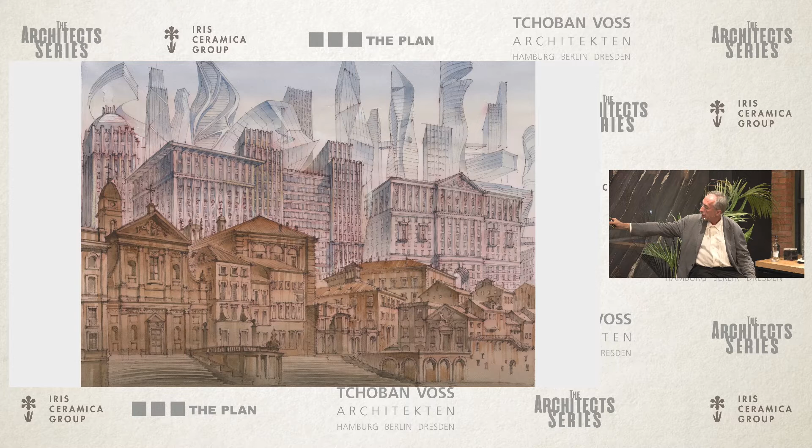Like 18th century work by Piranesi, 20th century the same blocks, but similar, not the same - another scale, another quality of details, another quality of town, much more density, much more huge - and then very free work of the town, very free body of the town of the 21st century.

Of course, we don't speak today about harmony as at the time of Piranesi, but also in the time of Piranesi we had a lot of controversies in the town. Remember the old temple with the Baroque church built just inside of it. So architecture was every time full of controversies.

And these controversies you see also in the town of Berlin. You see how deep the very controversial dialogue is between the buildings of, for example, the same time beginning of the 20th century or end of the 19th century, and the time of the mid 20th century after the war.

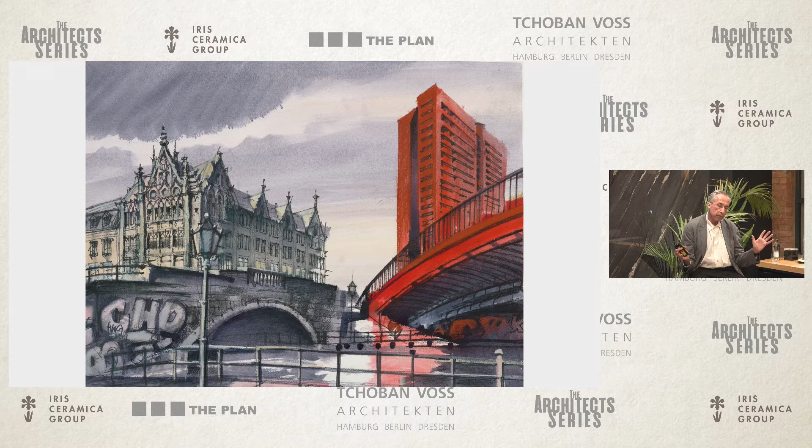So it is a deep contrast, a very hard contrast. And I think that is a hard contrast we have to preserve, because that is part of our history, and that is part of our memory, and that is a part of our town we have seen, we like to see, maybe we hate to see sometimes, but that is a part of our nature, of our cities where we grown up.

That's why I was just wondering about this house, and I wanted to preserve them against the client, because the client wanted maybe to demolish it, to make new facade. I explained it in the film, but in fact we found very poor substance and very bad substance.

But still, I understood that is a very, very important part of memories. That's why we got a budget. The budget was very modest, but we got a budget to rebuild this building, to renovate this building, not rebuild, but renovate, to save all that could be saved.

And in this case, we renovated the face of this very important after-war part of Berlin. I think it is very important work, and that is not important work only about physical sustainability, not demolished because you push out too much CO2, but not demolished because we don't like to push out our memory about the towns where we grown up, and we like to save, we like to keep this memory in our heads.

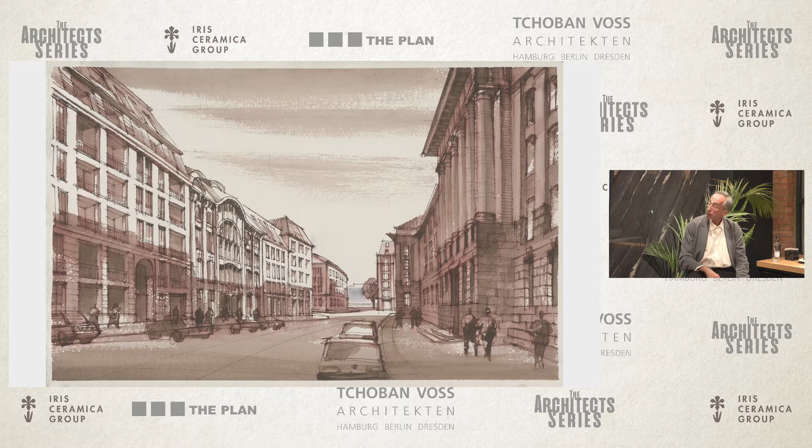In the middle, it was also made in the Jugendstil time, but already 100 years after, we have no possibilities from handcraft to make something else. So we made it more simple, like the house on the left, which was realized like the old.

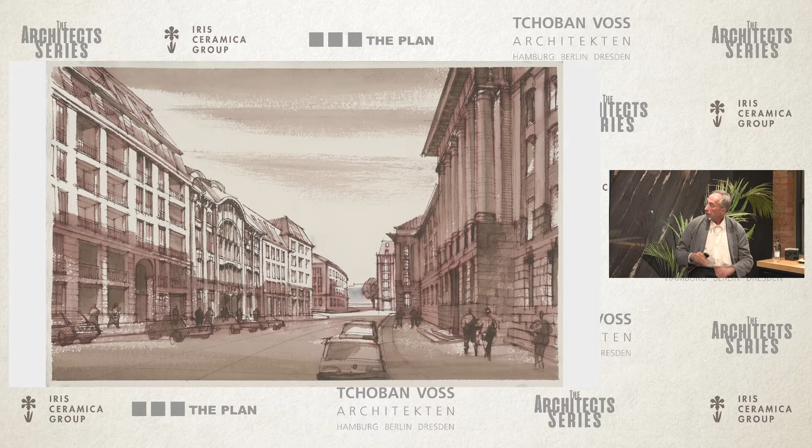But of course, that is in fact a very silly position, because the house on the right has in itself enormous power. To save it is to save a part of the history, because it was also a telephone station where the number one or number two from the DDR government connected with other governments of socialist countries.

So it is not only a building about 60s building style, but it is a building about the history of that time, the history of the DDR, and this DDR you cannot avoid. It is there, and it's very much in the body of Berlin.

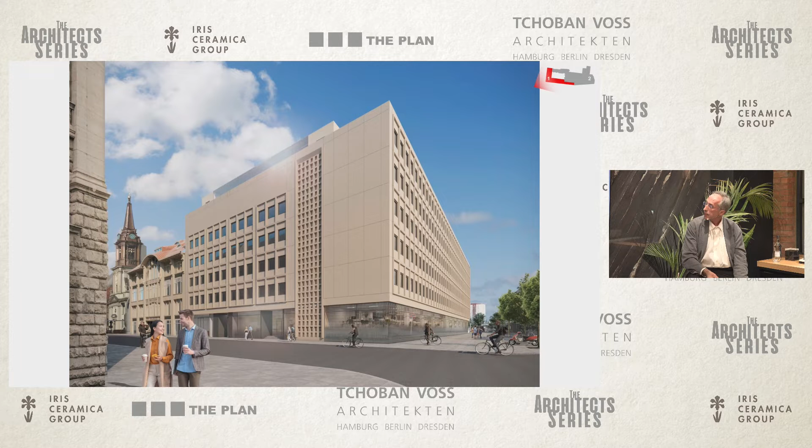Opposite them is one of the oldest buildings, the older city hall by Ludwig Hoffmann, an amazing building in Neo-Renaissance style. But in this contrast, I think we have a big sense.

And after that, to bring the new composition, of course we kept the line of the street and added some buildings to them, but did so by saving important parts of the existing building. Like this courtyard was before, this is now, so you recognize the existing one, you recognize the new apartment and office structures.

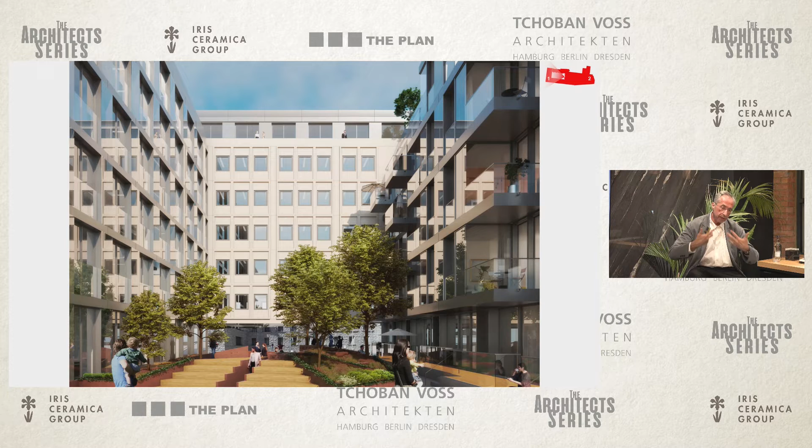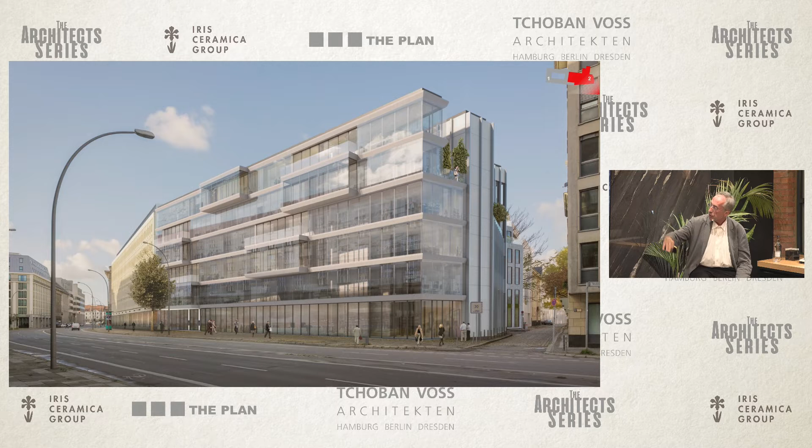And you still have this new contrast with the already contrastful building of the 60s. And we continued the line, making the new development along the street, quite contrastful to the left side, but also quite contrastful to another Ludwig Hoffmann building opposite.

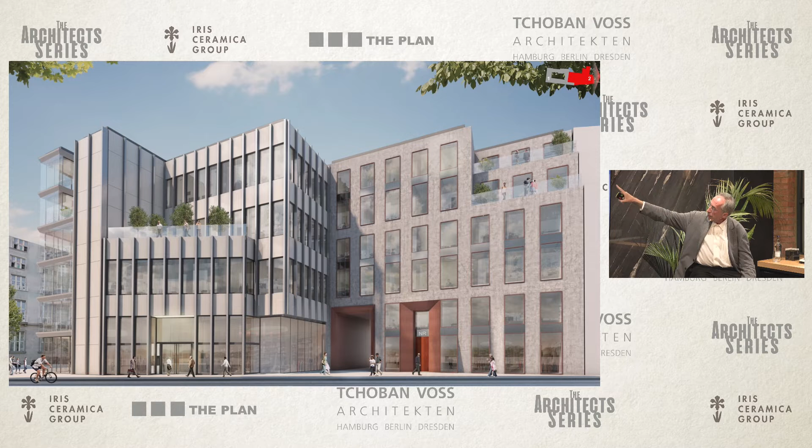But if you go around and see this small square, we added the square with some buildings, but you see very clearly the old one, this old telecommunication building, how it was, and you can recognize very clearly how the town planning of the DDR was.

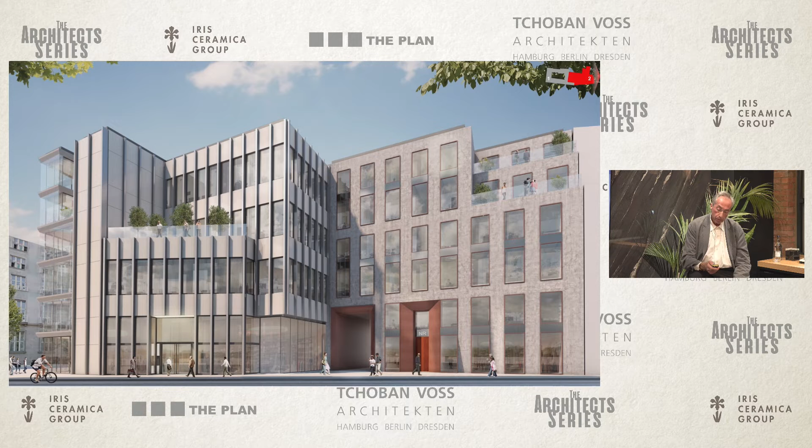And I think it is, once more, not about CO2 pushing out, it is also very much about saving the quality of ideas made in the time before us, and I would wish that my own ideas wouldn't go so radical as we sometimes do it, but to save them and to go with the next layer on top of it.

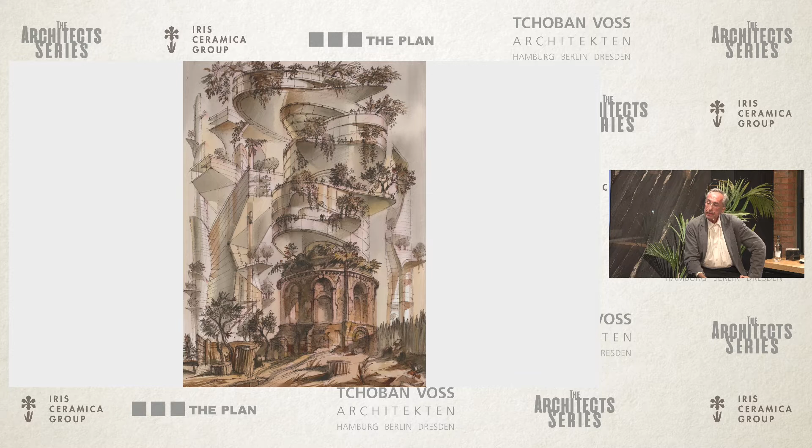Of course, the point of ecological thinking is everywhere around us, and as you see by the film, there are very, very many ideas of what is ecological in this complex.

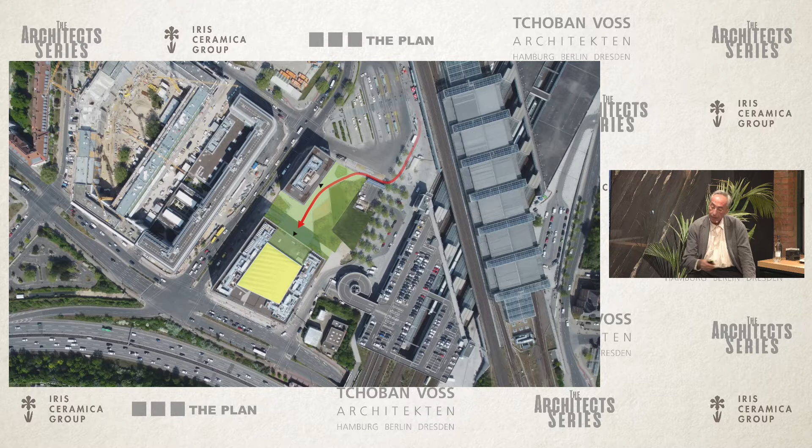We have a big green area, a huge terminal, which makes it possible to go nearly without parking places because all the people are coming by public transport. The whole building was made like a Lego work with a timber hybrid construction, which made it very, very fast in construction time.

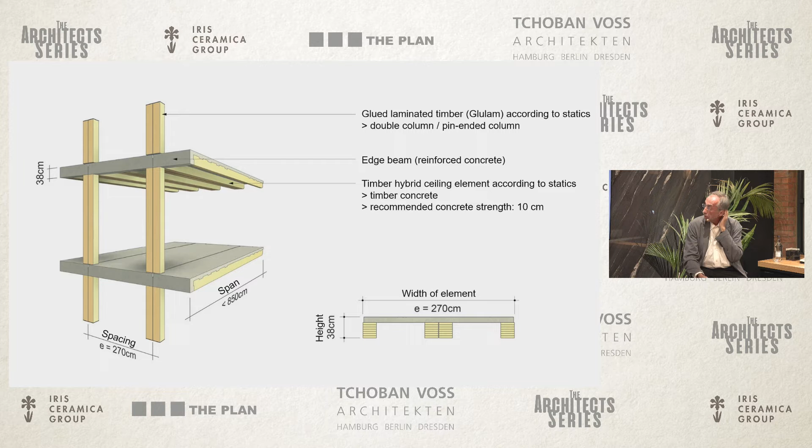In less than one year, around 30,000 square meters were built. It is of course sustainable from the position not to build long. It is a very light building, maybe 50%, maximum 60% of the weight of a normal concrete building. So you build lighter, you use less CO2, and you construct it really like Lego work.

Of course, I cannot imagine this building in downtown London or downtown Berlin, because this building is much less sustainable as a body for existing and enriching a downtown. But it is clearly a very good perspective for some office areas. They are growing and growing back.

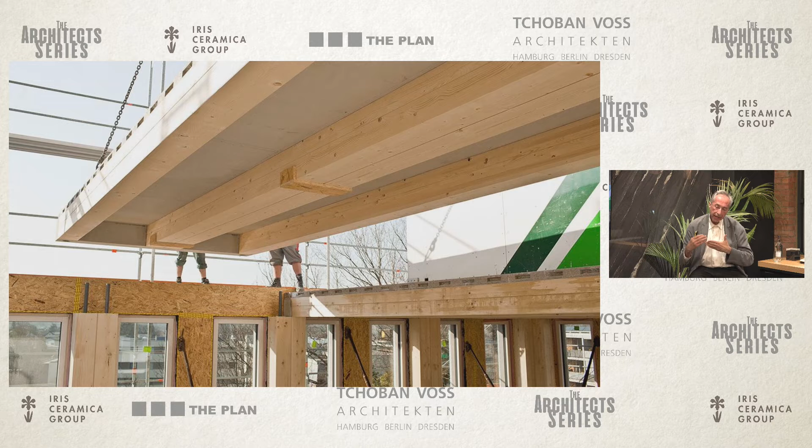Because in our office world, after COVID, we know we have 40% less the amount of office space needed for the same firms. This going forward and back is quite a nice idea from my point of view, because you don't set up something like a court that stays for 200 years and that's all, but you set up a model that could be developed, reused, recycled, partly changed.

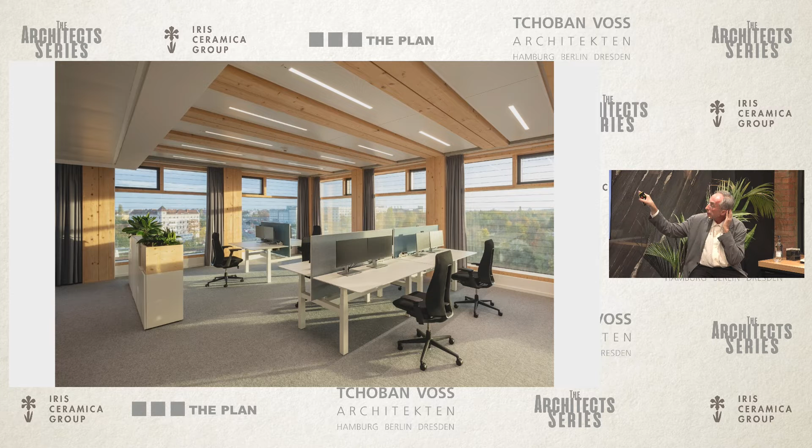For this filling of office space, I think this timber construction with prefabricated elements, prefabricated facade parts, timber columns, timber beams, with all the MEP elements involved between the timbers, is very clear, also very simple and pragmatic as a body, with some accents about wood, a big entrance, and of course much more extensive, expressive area inside.

Because if you like to build something really sustainable for warming protection, you have to be quite modest outside, because every meter of cantilever is some facade you have to protect against cold or warm weather. But if you are inside and already protected, you can be much more extensive.

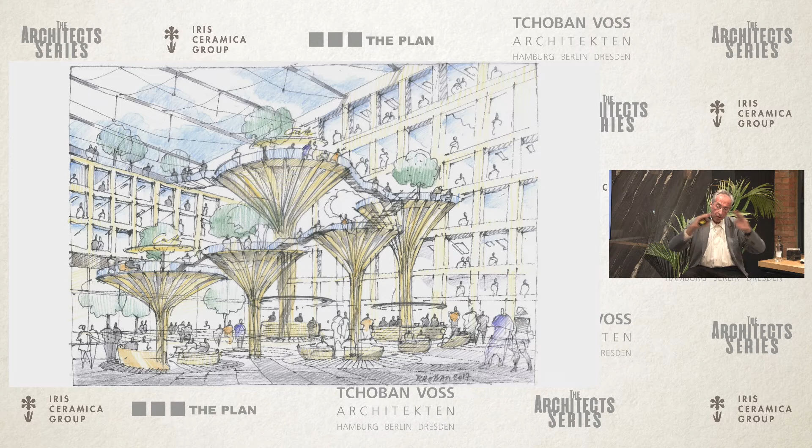So we have created here quite an interesting world, a part of the office world where you come from one level to another and go from one position to the other, can connect with each other, can discuss, have conference areas and so on. And then, step by step, you go till the roof, and the roof is also quite interesting.

It's a very light roof, only 45 kilos per square meter, and even against wind you have to protect it. That's why we combined timber and steel construction, which is very light—the timber elements are only 45 centimeters high, which makes them very light, with a lot of daylight coming through.

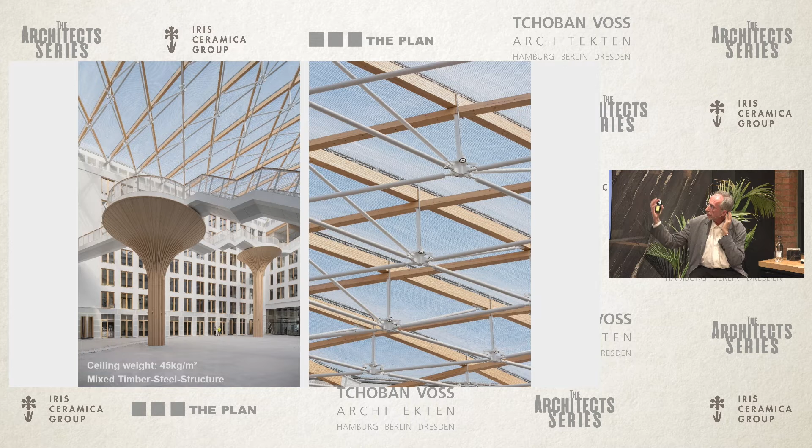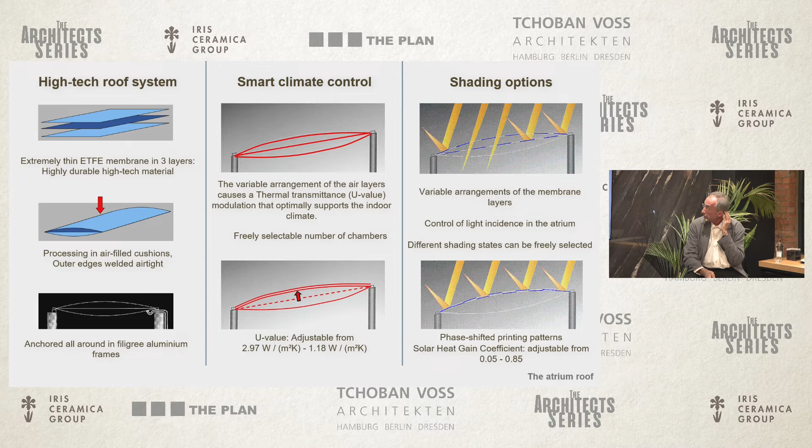It is not glass, it's a foil-tech roof, which is very good for acoustics. It's very good for cleaning, because the tension is much less, and it is very variable for sun protection. So you can react with this living roof to different conditions for sun protection, day or night time.

For cleaning, as I told already, the tension is much less than glass, so you can clean it very seldom, because all dirtiness goes with the water by itself, and doesn't stay there like a film as on the very high-tensioned glass construction. Here it cleans itself.

And with this all the way, you go upstairs, you go till the loggia, and they have a very nice space inside as outside. You are looking over the town. It's like a feeling of, let's say, light timber smells.

I've been there for 2 days with some people. There are a lot of people there. They like to see it, and sometimes I make excursions, and the feeling was very good.

The people were sitting on these islands, on the trees, they were discussing, they were coming over and down over the staircases. The light was everywhere, still on, because the people were working there, and you've seen these Venetian ceilings with beams.

Nice feeling. But as I told, it is a sample to make like a Lego work for some office island, made as a big office island, but not in the direction of deep and dense downtown.

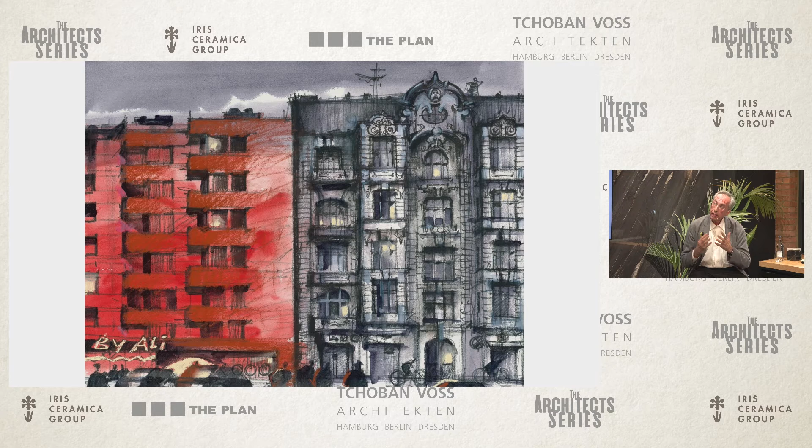We don't find today the people making such details by plaster or by stone outside. It is a completely different understanding of handcraft, of handwork in the world. So we have to create comparable quality to what was made for 100 years, but with completely different elements. Also, our facade structure became completely different.

It was massive for 100 years, so if the plaster was going away, you would see the brickwork. If now this very thin element goes away, you see something stupid, maybe some rats or I don't know who is living there, nobody expected it, but they are there. And it's a completely different feeling of material.

Steel we have to work with, and we have to create after this. Behind this facade is also insulation, and behind this facade is also insulation. But the surface should express something that can be compared with a historical structure, not in the way that we put gips plaster on top and create from very poor materials something that looks like neoclassical, but with other materials.

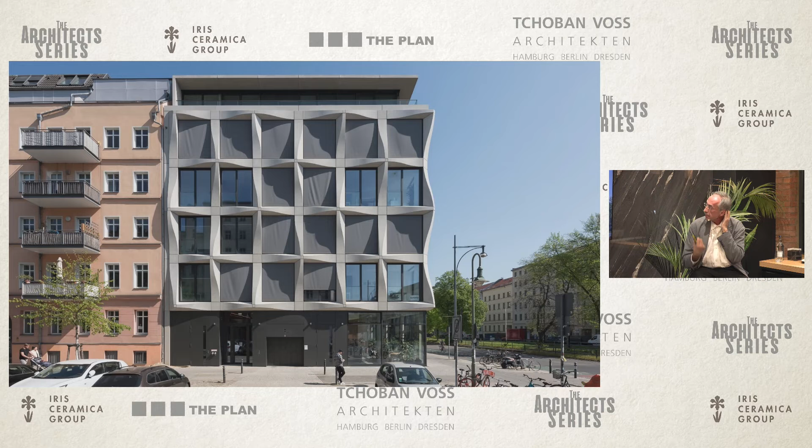Another feeling for surfaces without the details of the past, but hopefully with the same depth of the past, making the houses in another way, but with a quality of monolithic surfaces comparable with the quality of monolithic surfaces of the past. That's my idea: to create with contemporary materials, with contemporary structures, something that could be, I hope in the better samples, comparable with what a very normal plaster house left could make with very simple handcraft at that time.

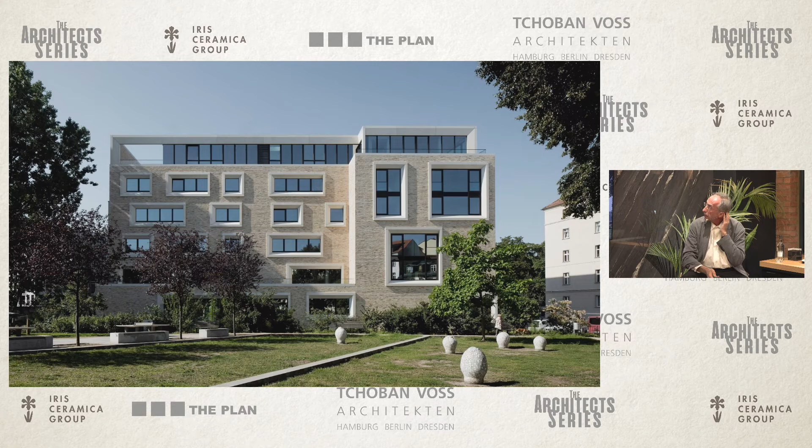So we have interesting brickwork. We go with this brickwork against concrete frames and create something that, from the sustainability of materials, from the soil sustainability, these materials could stay long, could age long, could age well, and create surfaces that are interesting to touch, interesting to come closer to and feel as touchable and serious surfaces.

Another point we have to speak about is, of course, the scale of the town—the scale of what my colleague Frank Focke explained with these three gable houses. At one time I thought, okay, we had this modern building from the 60s, we demolished it and made three gables back, but with much less detail than before.

So it is also some controversy in this position. But one thing is clear: we have small sections of parcels, small sections of addresses of houses. And that is, of course, what we have to keep in the old town, because otherwise we will create huge buildings with huge scale, incomparable and uncomfortable to see next to the historical small parcels left and right.

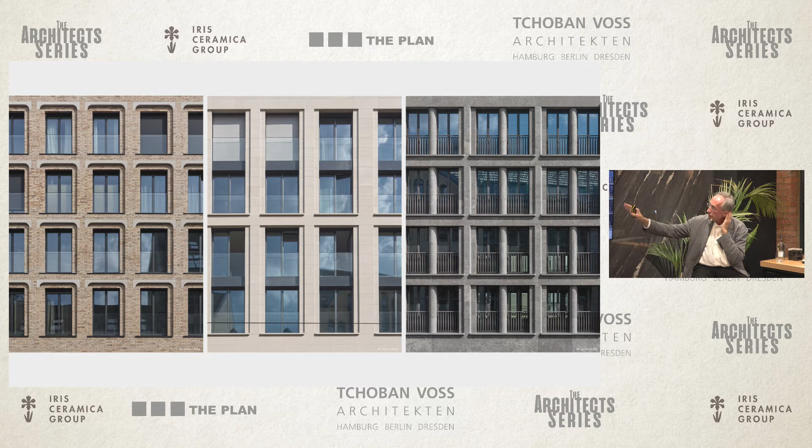As I had to build something, unfortunately demolishing before a very huge and scaleless building on this side, I decided to make really three addresses with three, I think, serious surfaces, serious elements and reliefs. They are of course not with the same details as it was for 100 years before, but hopefully with very small curved elements of railing, small curved elements of concrete, fine brickwork, fine elements of natural stone window framing.

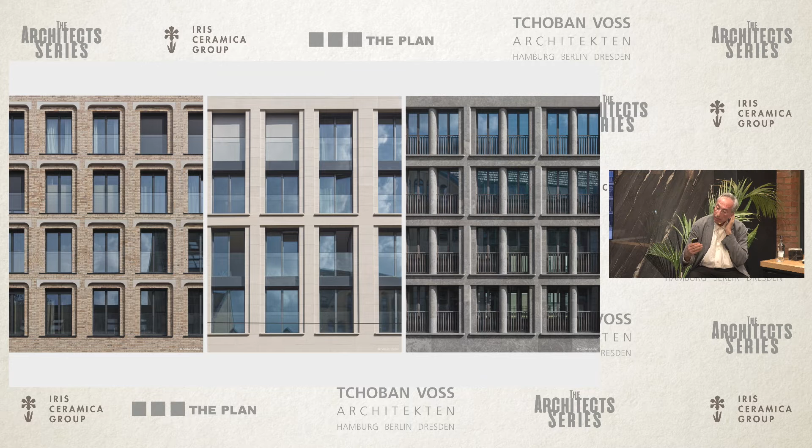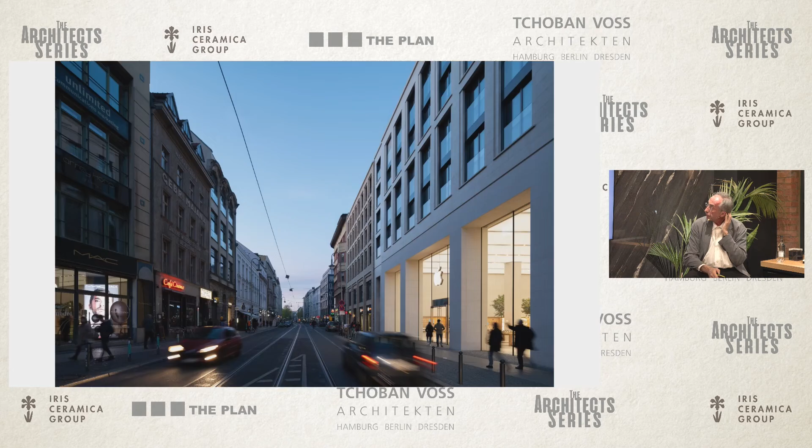I hope to get somehow closer to the feeling of surfaces I am amazed by in the old buildings. Of course, also the generosity of entrances, generosity of ground floor openings, or as in this case with a void till the first floor for New Apple in Berlin. This makes them somehow a destination, and hopefully gives them a chance to stay in concurrence with very interesting old samples and elements of this very typical street of Berlin.

I made this one. Of course somebody can say it's completely ugly, but I think it's not ugly—I think it's nice, because you have the volume, the reliefs of this corten steel, old steel elements. They come in relief, but also in the quality of patina of these elements. Near each other, you get the same effect of a big street and neighborhood with similar details.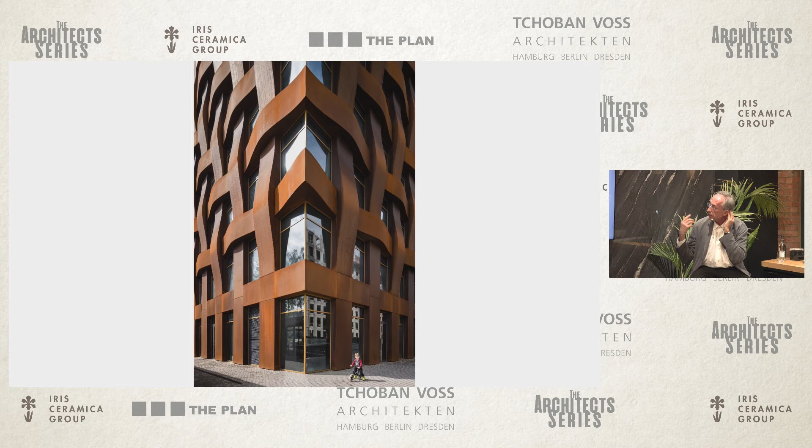Still you get a similar effect with the relief of the pilasters, but not by reconstructing the columns—rather by creating another relief in, from my point of view, a quite contemporary way, but also in a way that allows a good possibility to create a patina, to age this work of facade, this Fachwerk of facade, and bring them a feeling of materiality, not a feeling of paper as a material of facade, but a feeling of materiality.

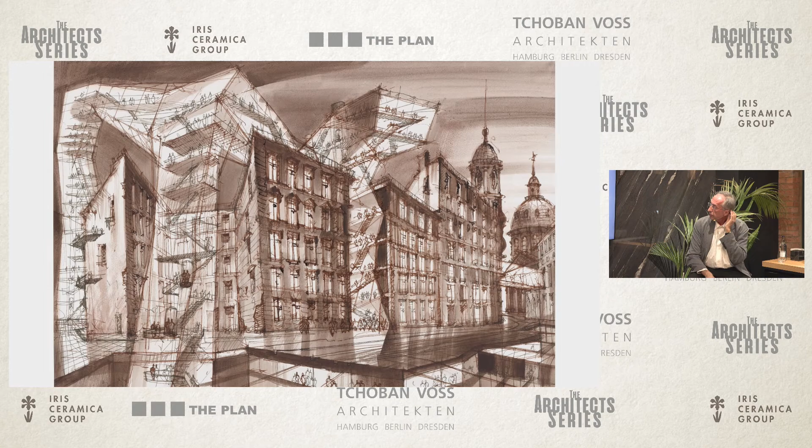And of course, another point is the form. Earlier, the form being very significant was not really a point—maybe the form was significant for some cathedrals and gate towers, but for normal buildings it was not a point. Nowadays, of course, we have a lot of buildings with extremely important form, and this form gives the accent for big parts of the ensemble.

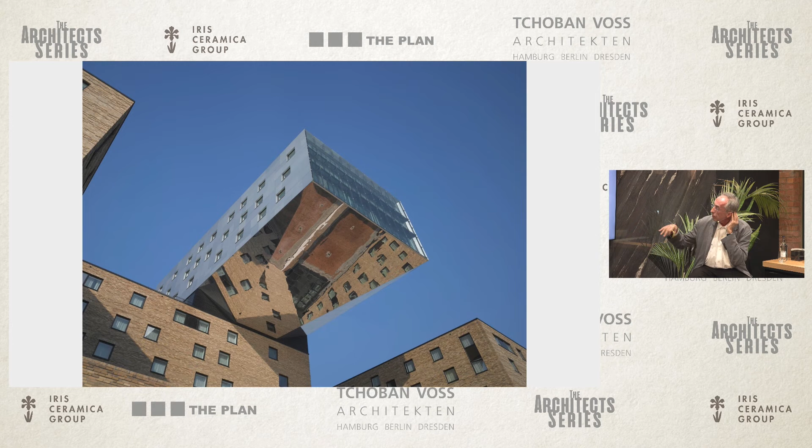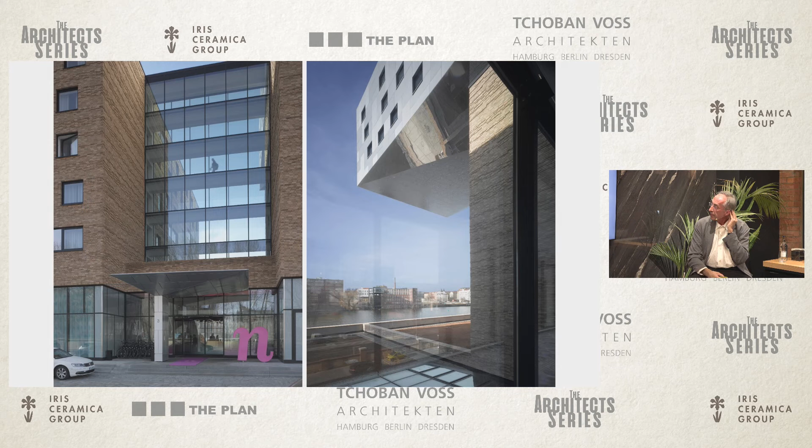So it could be a very simple structure, with one part of the structure going up and giving the space frame to the whole complex. In our time, form becomes a very important part of architecture, much more important than before, because before it was more or less facade language. Nowadays, it's very much form language.

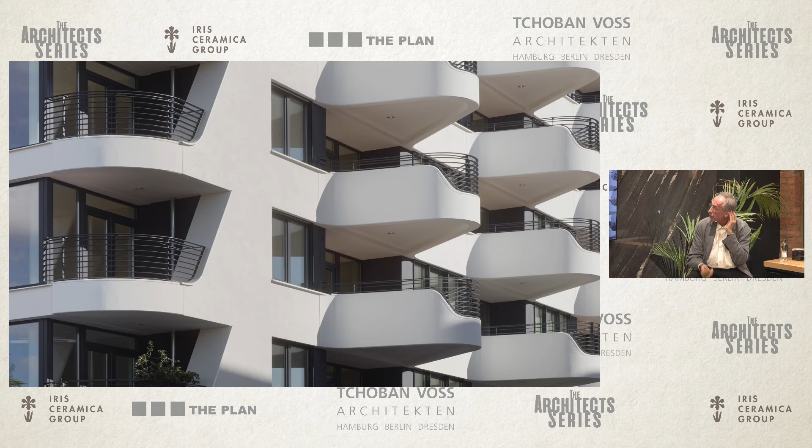Every building, with a smaller or bigger expression, brings form to the language and gives it some accent, as a possibility to speak a new tone in comparison to the old architecture around. And it makes sense, from my point of view. It is not a position that you try to make something like old, but you still have something that makes a new tone, an old tone, in this complex.

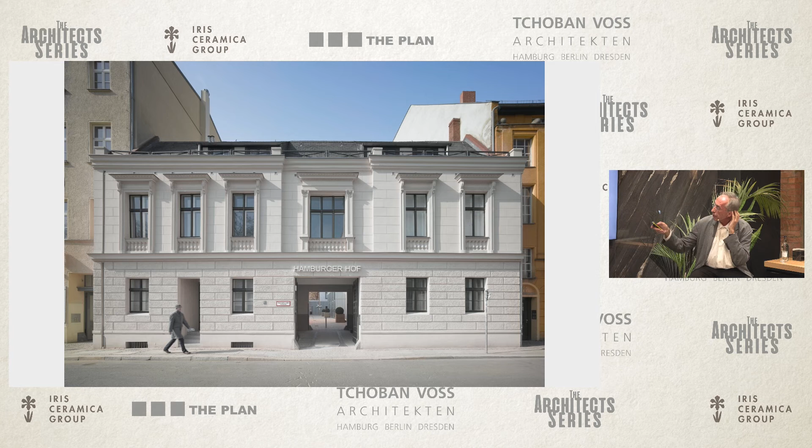For example, in this ensemble, you have a very old building from the 18th century. You come in, you have some old elements, and over them are going new elements - that's what I like in contemporary architecture. It goes into a very controversial discussion with the old heritage elements, giving them a good possibility to speak to each other. Maybe it's speaking with a noisy voice, but it's some controversial, interesting dialogue between old and new.

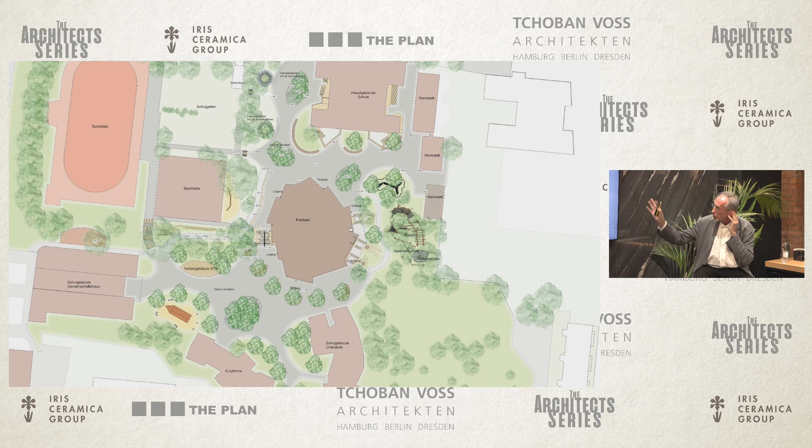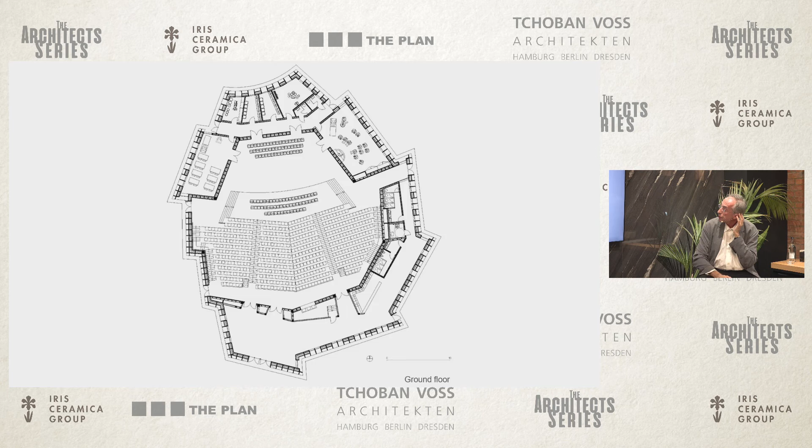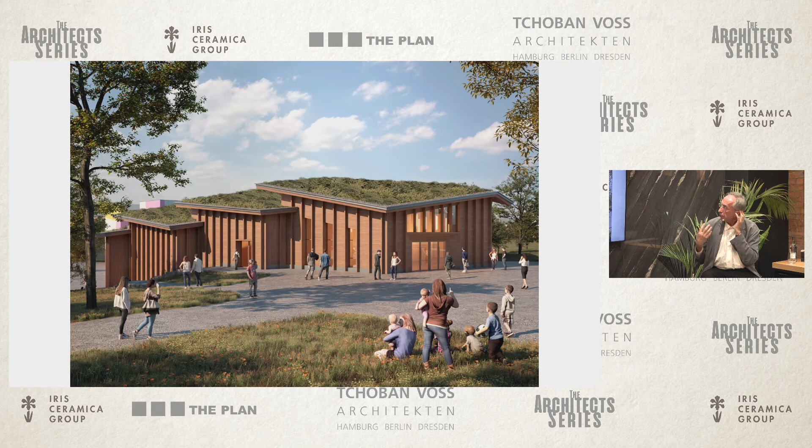...middle element, a small gem, I hope, to create this music hall for 550 people, completely made of timber with green roofs, with earth energy fitting the building - also completely independent from fossil energy, but also in the scale of the building, which I'm always caring about. The scale of the building is respectful to the scale of the smaller buildings around, made by colleagues in the past. So in the new language, you still save the important scale, and bring it inside as well.

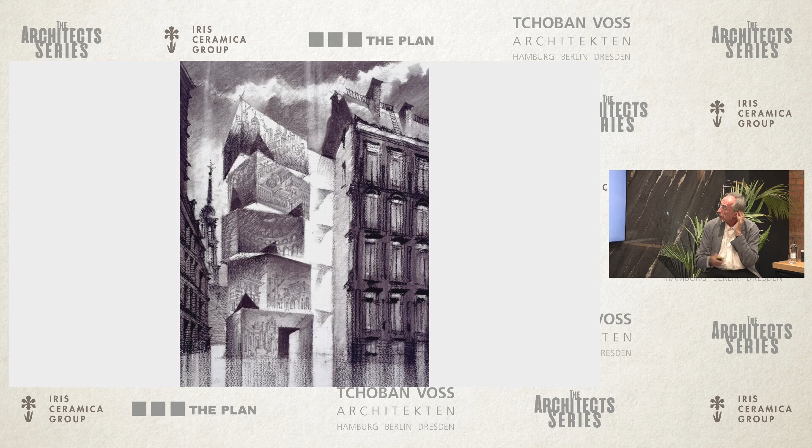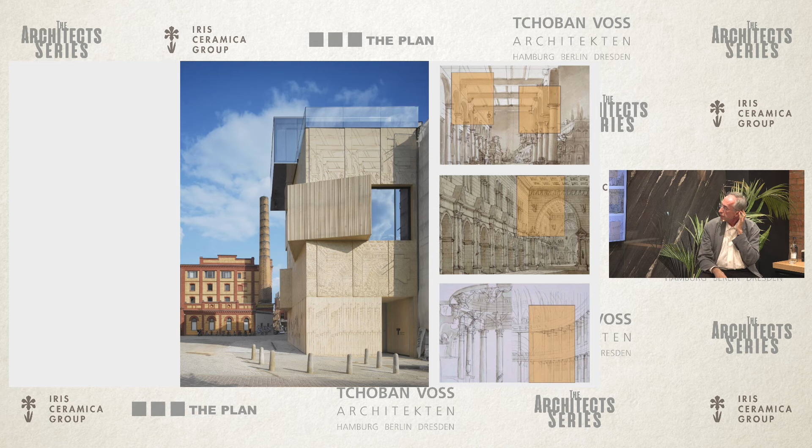And I'll close my speech with this idea of a museum. It is, in fact, the foundation I made for the drawings, because I like to draw, as you've seen, and they are printed, the drawings. They are first in my collection, by Gonzaga and Toselli, two great Italian artists, stage designers of the 18th, 19th century, to speak to the fact that the drawings are inside this building.

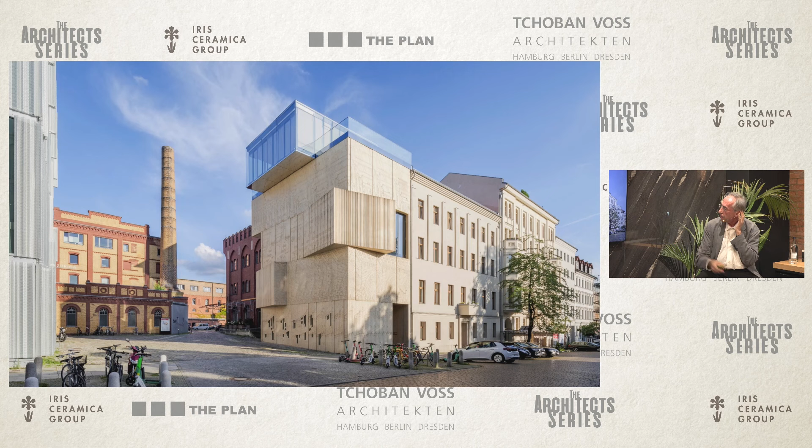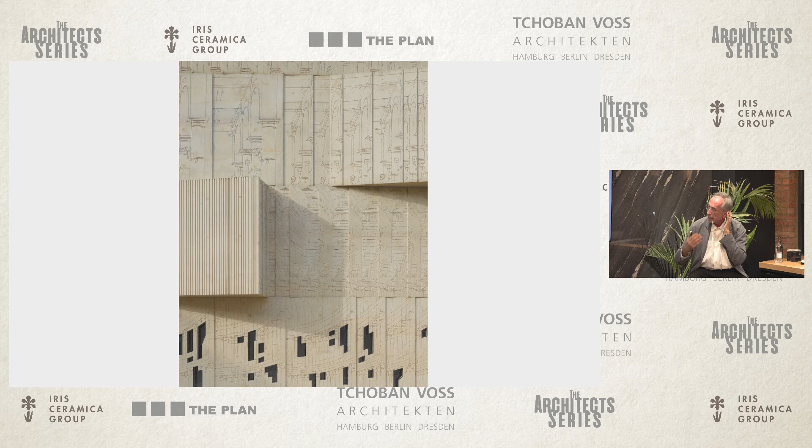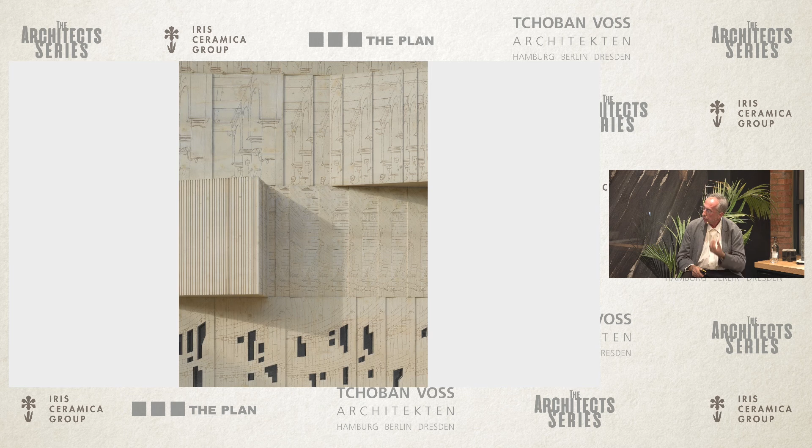But it was also important to work with a very contrastful form. Form is very important now in architecture, maybe more important than the facade. But still, if you come closer, in this way, with exhibition halls, archive, office, and library on the ground floor, you have to feel something more. You have to feel more density in the detail than you'd expect seeing the building from a longer distance. So if you come closer, you have to recognize more - you have to create a new feeling of diversity of facade elements, which is very in keeping with what the old buildings around have.

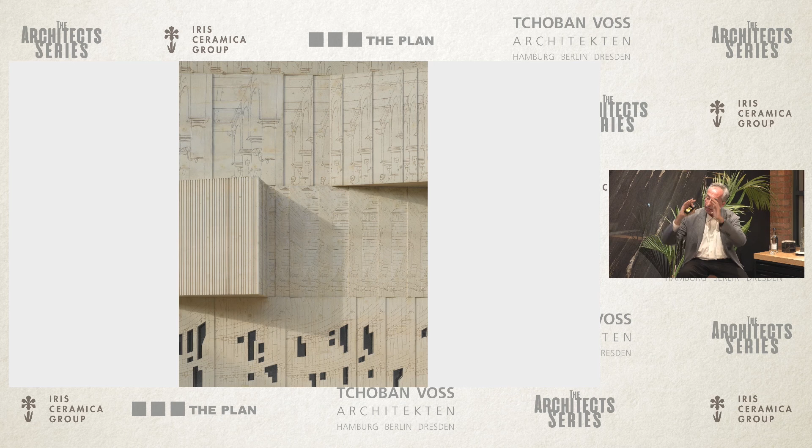You go from a big distance and you see the form of the building. You come to the old building and you see a lot of small details. So here, the same feeling: you come closer, you see these printed matrices, how they were made by the construction on load-bearing walls, and you come in, you see the curves, inclined drawings also inside.

It's a warm atmosphere against a very cold atmosphere outside, all the way down to the door lever, to the creation of smaller elements coming together like handcraft from the older times, maybe 400, 450 years ago, up to the very top, with these terraces and office space made with a very light double skin, sustainable construction.

All the building is very sustainable because this outline structure, the concrete structure, saves around 30% of energy by acting like a thermic skin for the whole building, not making it possible for cold or warm atmosphere to pass through. This is important for the drawings, because drawings have to be saved and have to be exhibited with very careful conservation.